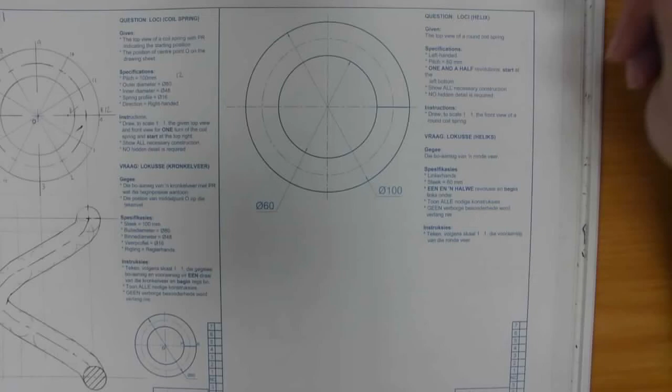Hello grade 11s, I'm looking at drawing on page 101, on the right hand side. What have they given us here? They've got a coil spring. Here is the start point. It's left-handed.

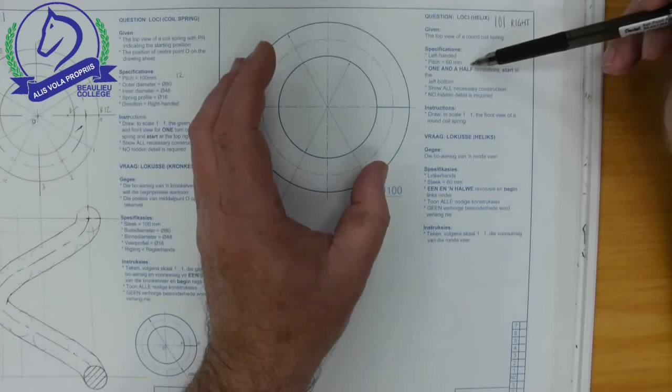The pitch is 60, so one revolution is 60, and they want 1.5 revolutions. So if we do the calculation, we need 60 times 1.5, which gives us a height of 90 millimeters.

It starts at the left bottom, show all the necessary construction, no hidden detail is required. Draw to a scale of 1:1 the front view of the round coil spring.

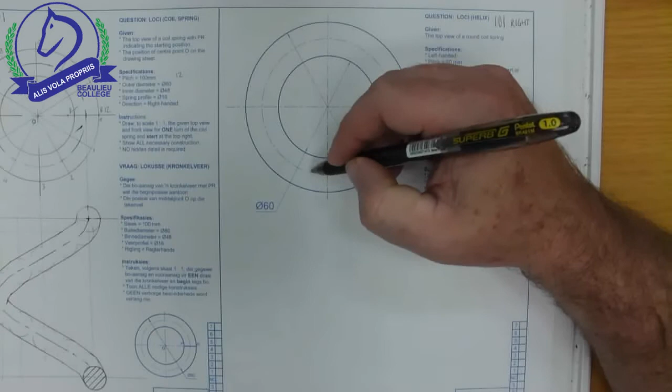So let's remember, for the coil spring, the most important one is the center line here, because this is actually circular in shape. So we take the pizza slices where they cut the center line, because that's where we will then draw our circles.

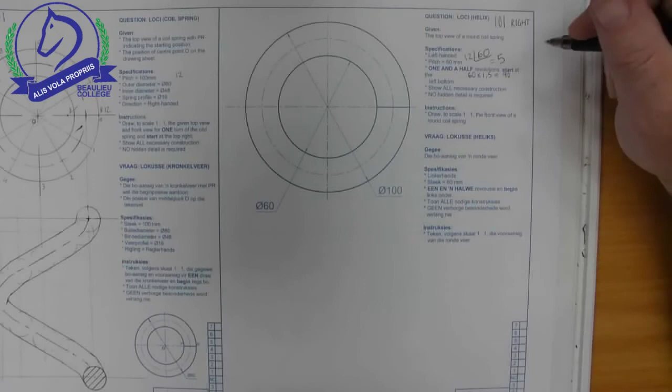So I'm going to split up my shape here into pizza slices, then mark off my height of 90. The good news is that the pitch is 60, and we have to divide that by the 12 segments, and hopefully you're going to get a better answer than I did the other day, and that will give you a measurement of 5 millimeters.

That's what I want to do now - take my centers down and then mark off my height of 90 and mark off the height divisions of 5 millimeters.

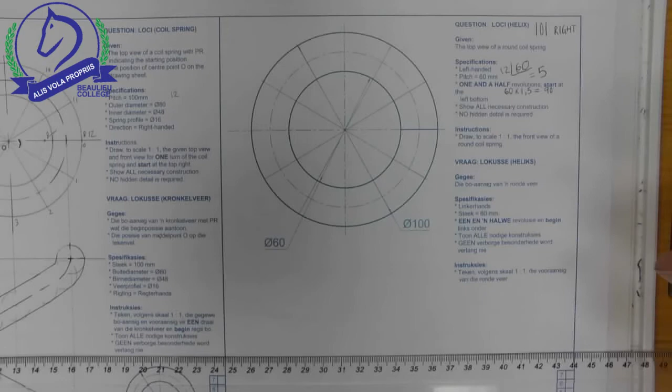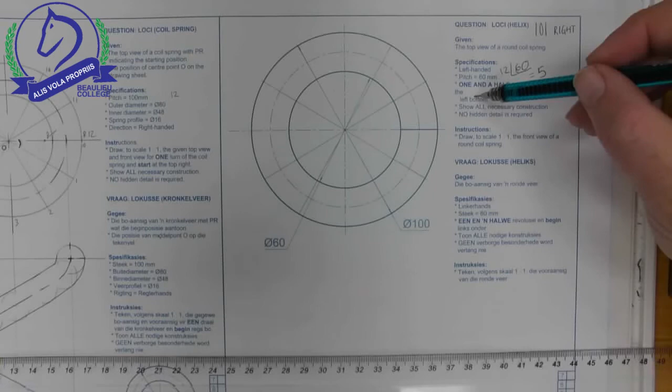Something we just need to understand now with our labeling. This point here is the end of the coil, but this is going to be the top end of the coil, because they've said in the information here that we've got to start at the bottom left. So the bottom left of our spring is this side, and then we're going left.

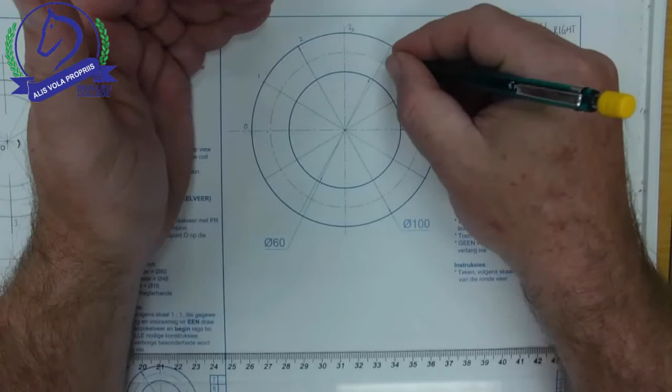So when I label this, I need to go clockwise. So that will make my 0 point, and then mark those off after that. And remember that we need the center line points and not any other.

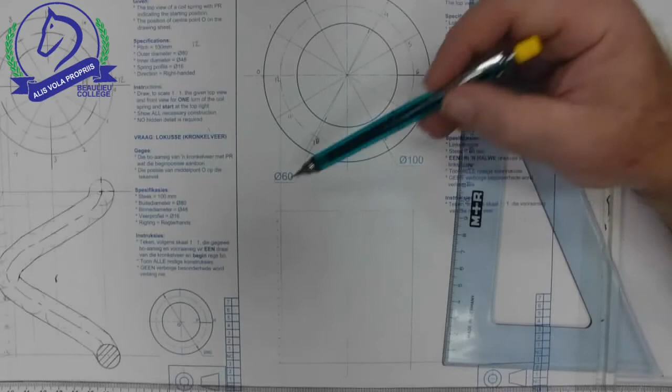So I projected down my outline and my center there, and I've marked off my 5 millimeter height divisions. Remember, I got that by dividing my pitch by 12 - 60 divided by 12 gives me my answer of 5.

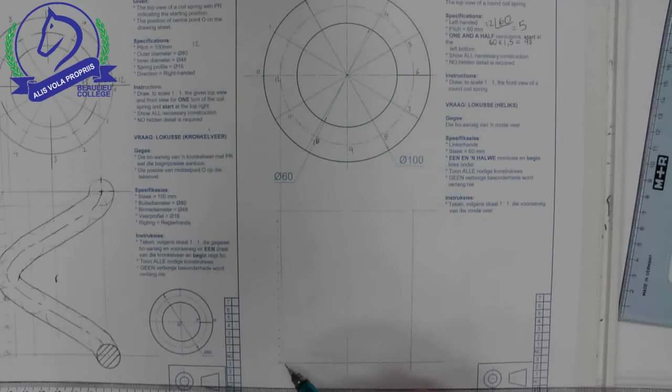Remember, they've told us that we need to start on the bottom left hand side. So I'm going to start with my 0 label there, and work my way up.

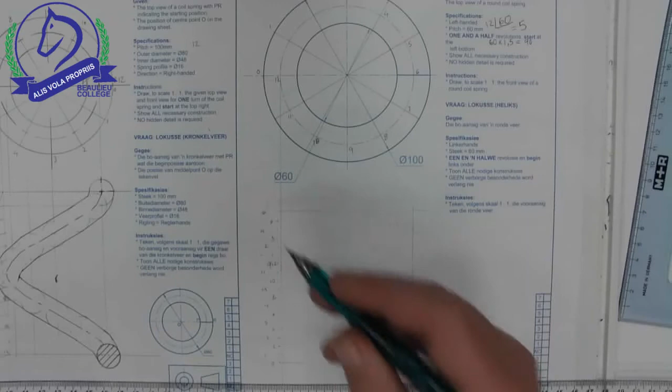The method I prefer to use is to take my pizza slices down, remember I'm taking them from the center line and not the edge of the shape.

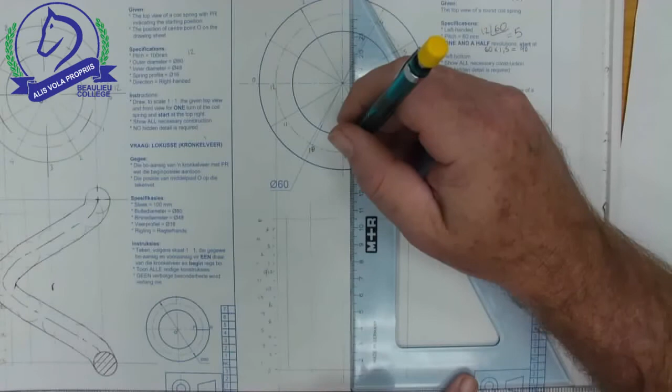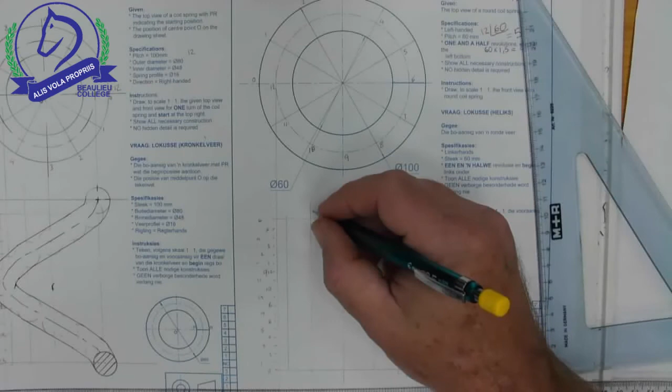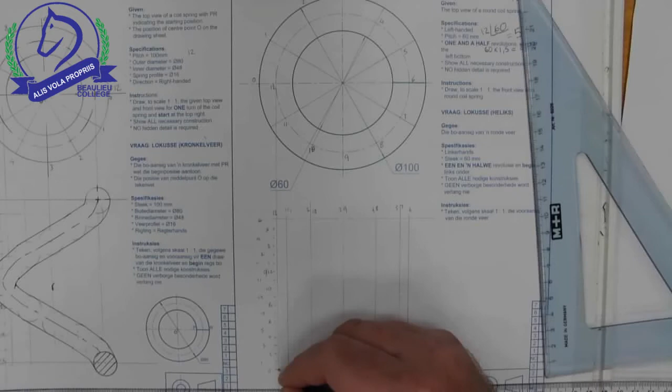Now we can match up the theory of 2 points. So 0 and 12 is my start point here, and here is height level 1 matching vertical line 1 for 2 points. There's 2, there's 3, 4.

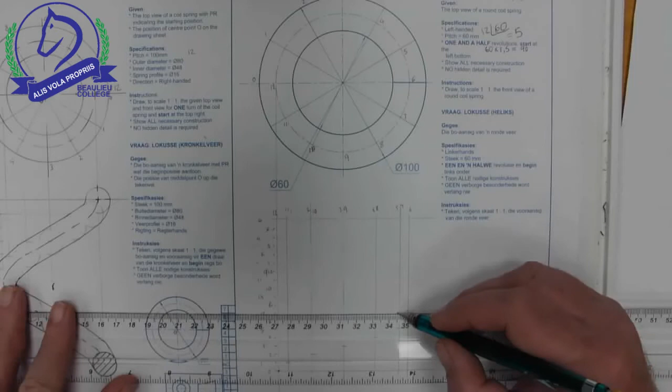5, 6, 7, starting to come back. And I'm following these points all the way around, matching up the 2 points. I've marked off all the points that I've got.

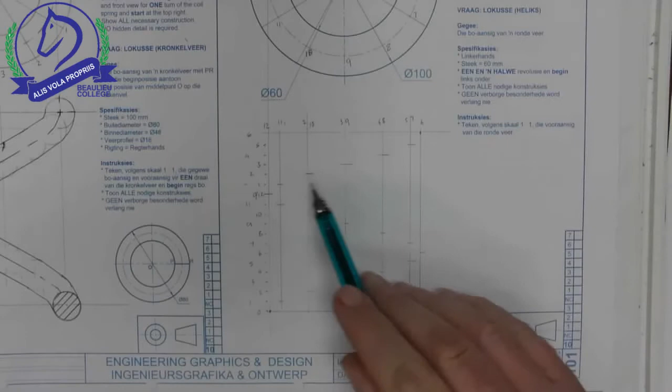Now we need to remember this point is indicating the center of the circle. So at each of these corners or intersections, we now need to draw our circle for the spring. Now for a change, they didn't tell us what it was - we could work it out.

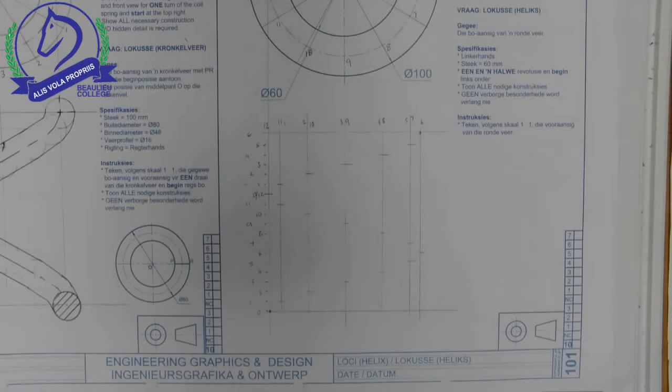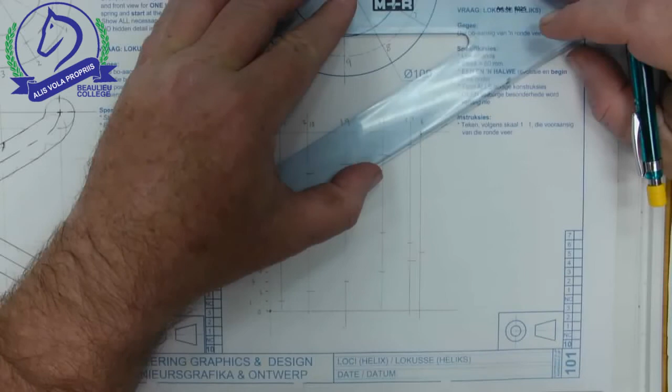Your 100 minus 60 gives you a measurement of 40, and we've got it on both sides, divide that by 2. 40 divided by 2 means that this distance is 20. You could measure it to check. So there, that's 20 millimeters, meaning our diameter is 20. If you have to measure that, the diameter is 20, and hence your radius is 10.

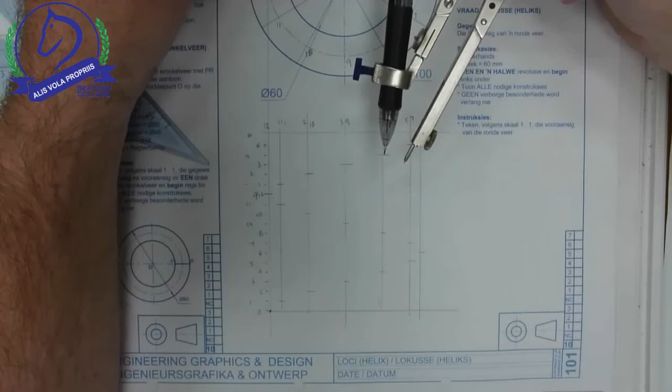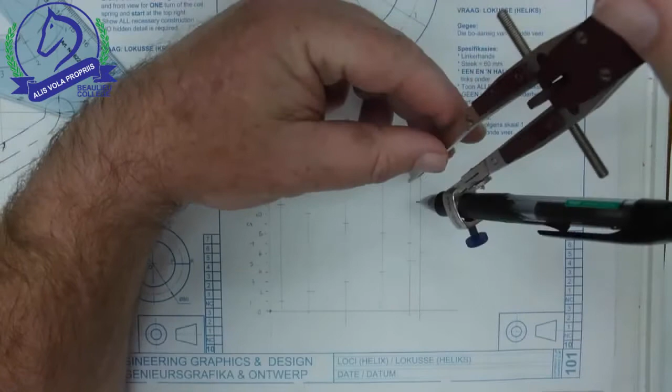I've got my compass set at a radius of 10 to draw my diameter 20. What you can do is use your circle stencil, and in reality we don't have to draw every single circle completely. What we're going to do is try and find the tangents.

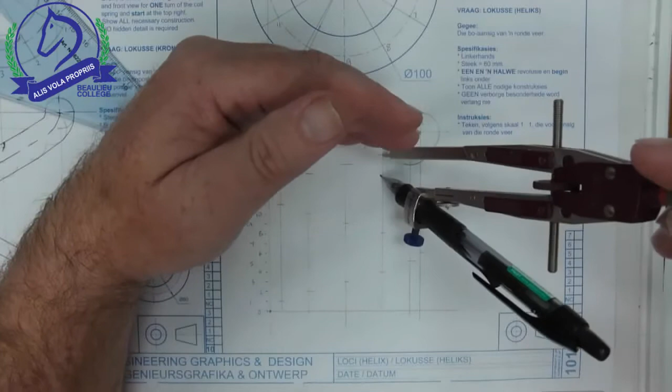So if this is where this circle needs to go, that's where the point at the highest point might be needed. Here is the bottom point. And you can follow that process along. So you're trying to draw a happy face and a sad face for each of those circles.

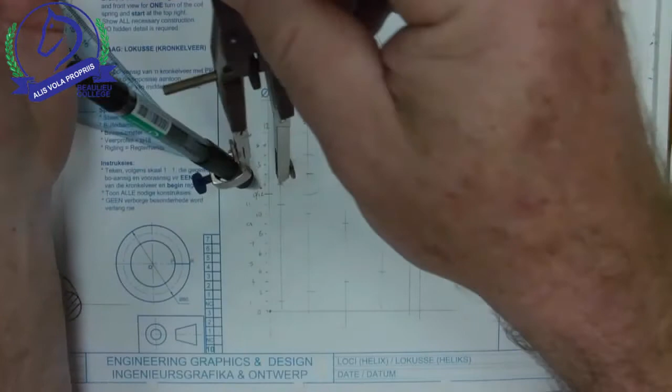The reason that I don't want to draw my whole circle is just a time reason. If you're in a rush for time, you don't want to spend all your time going through all of these circles. At the bend here, this point overlapped.

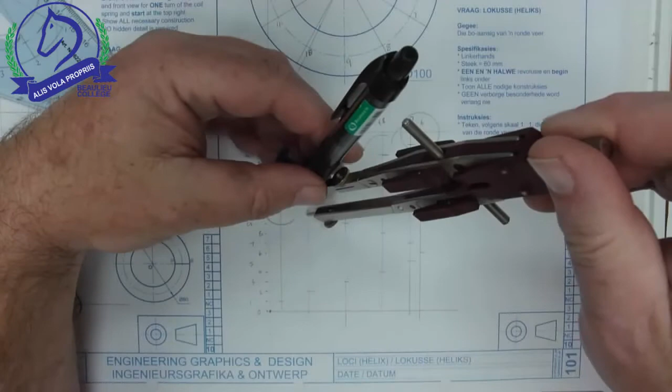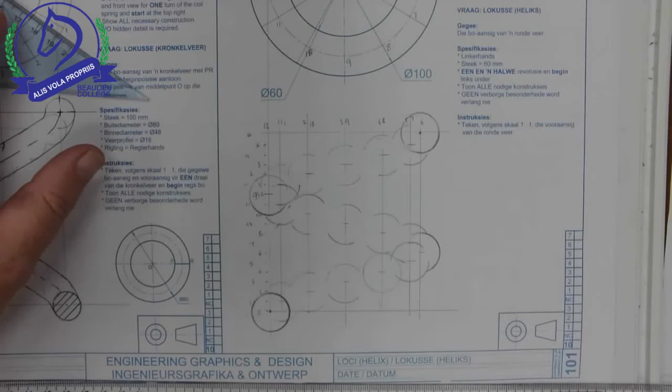You won't hopefully make a little slip like that if you're using a circle stencil. There I have the outline of my points, my circles, where I've done the start point at the bottom left and the end point after 1.5 turns. Both will have hatching in these views.

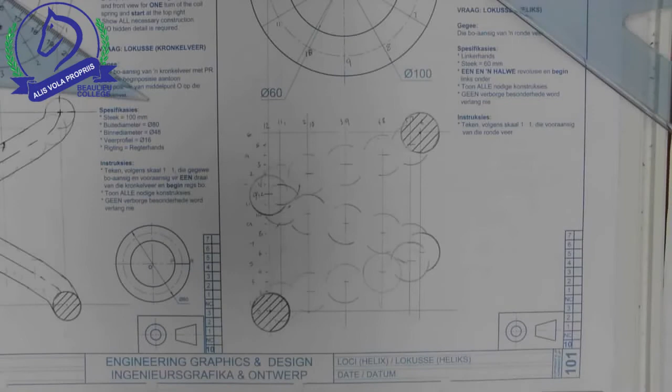There's my hatching for those 2 endpoints. Now remember, I'm going to join up the 3 middle points with a tangent. So check for your accuracy.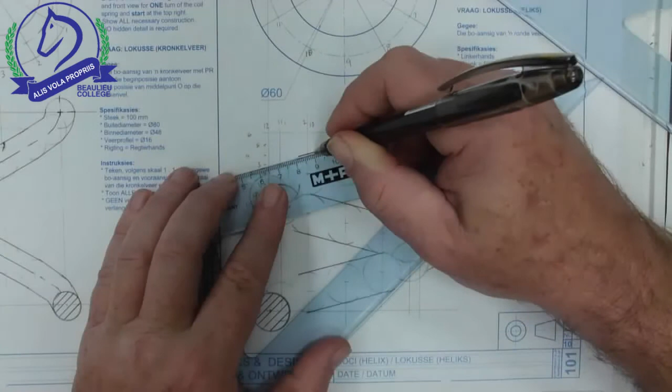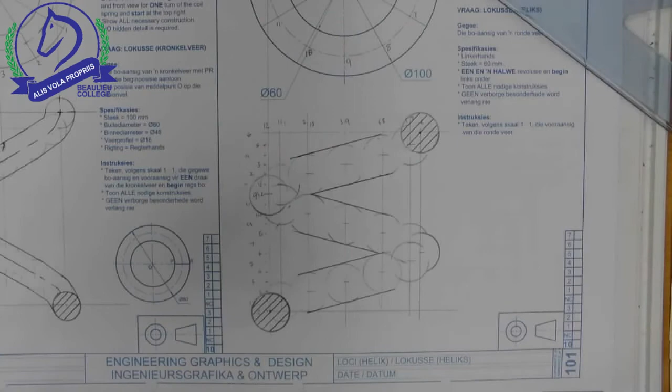Can see where that point's going to go around. Take these edges, going down a bit, and here's where your curve would be. See, coming around before it's linking up on the other side here.

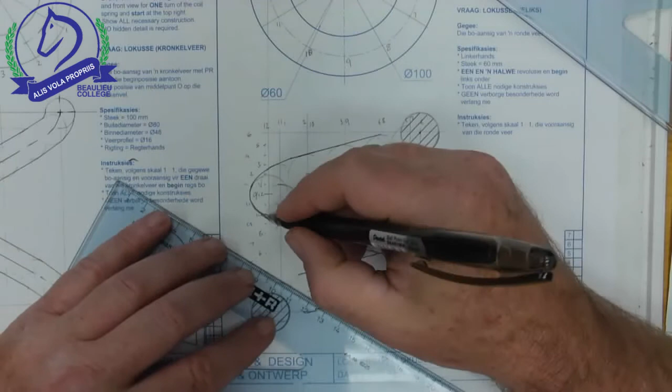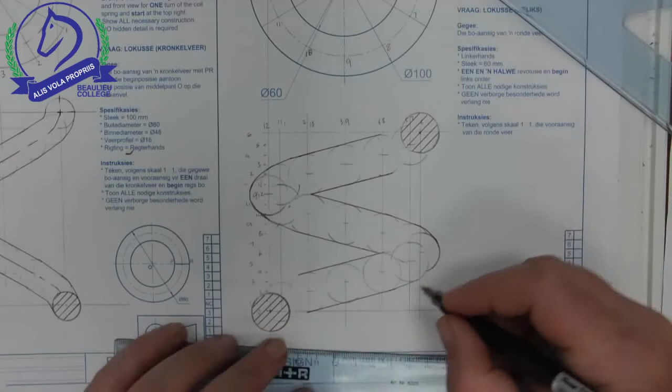That was quite a good one. Okay, so there should be a slight drop here and a curve. Follow the shape around. Here is our little drop. And a curve into our bend.

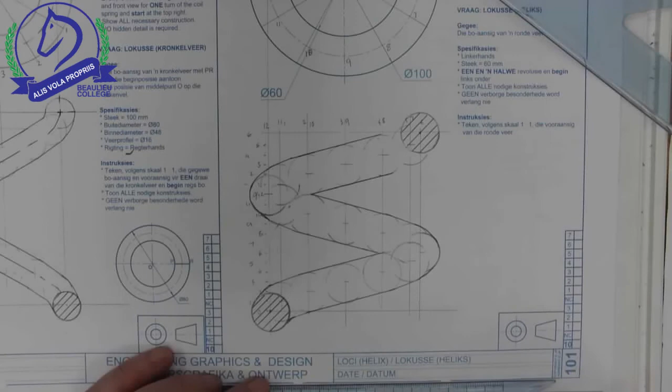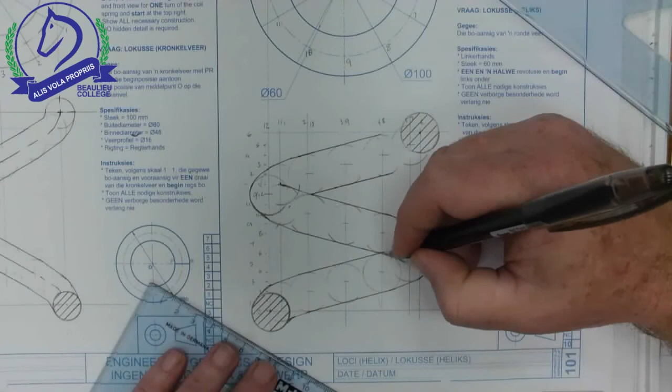Oh, that one's very close. Now the tricky little ones is that this point will actually extend till up here and then sort of disappear, and the same on this bottom one here. We'll see this going to its edge here and then disappear. Sorry, I haven't done these ones.

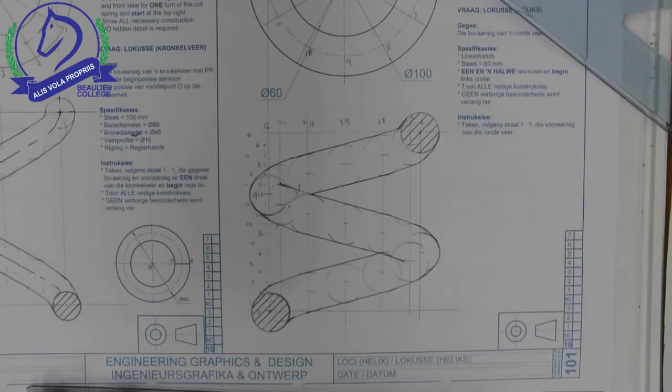And there is most of our drawing. You would have a center line going around for the shape as well.

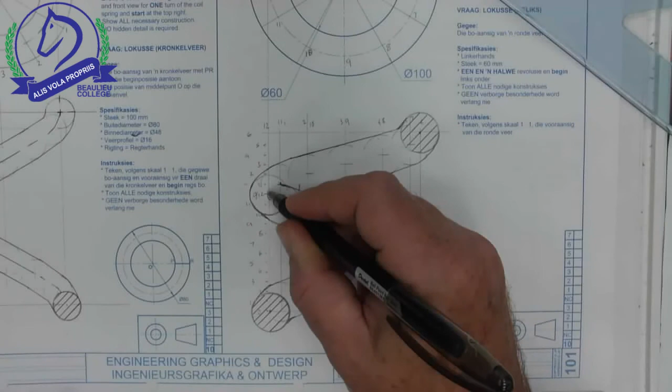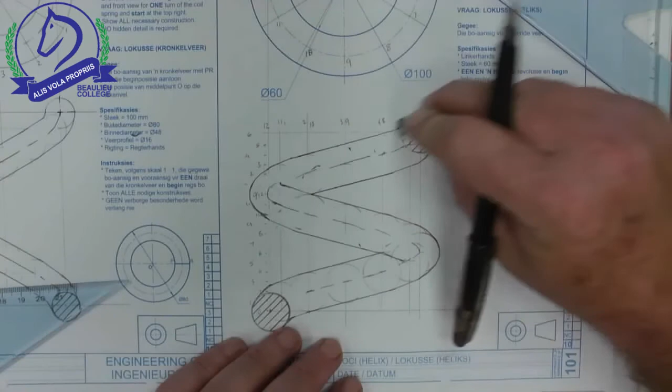I would try and neat it up a little bit, just so that it's more visible for you. If you've done your construction lines light enough, then you shouldn't have a problem.

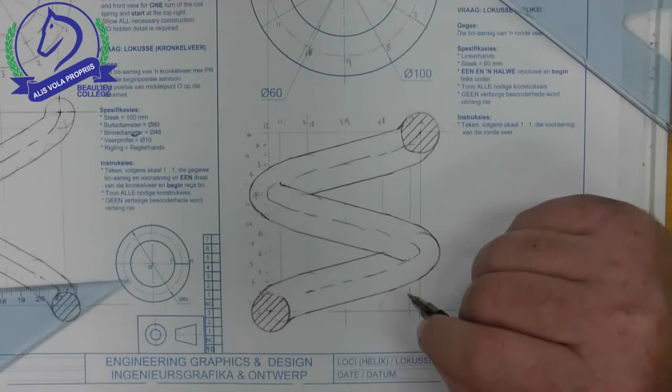That there is drawing 101 on the right hand side of the drawing, a spring with a left hand thread. And why it's like that on this one, here is where your left hand would be, and that's where it's curling around and then going up to the left.